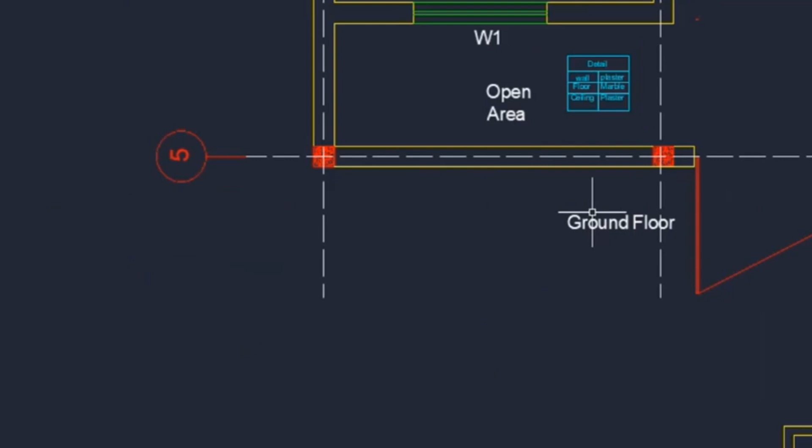Hello, in this tutorial we are going to find out brickwork in superstructure. Now for brickwork, what we need for volume: mean length of our wall, breadth of our wall and height of our wall. And with this it is very important to do the deductions as well: deduction for the columns, deduction for the doors, windows or any kind of opening. So let's move into the plan and find out the brickwork quantity over there.

Now I'm here in the architectural plan, and it is very important when you find out the brickwork that you have the architectural plan. So we have the ground floor here. We have only one floor, the ground floor, and in order to find out the brickwork we need to convert the walls into two parts, the vertical walls and the horizontal walls. It will be easy for us to calculate like this. So here we have the plan, and we have vertical walls over here, and we have horizontal walls over here.

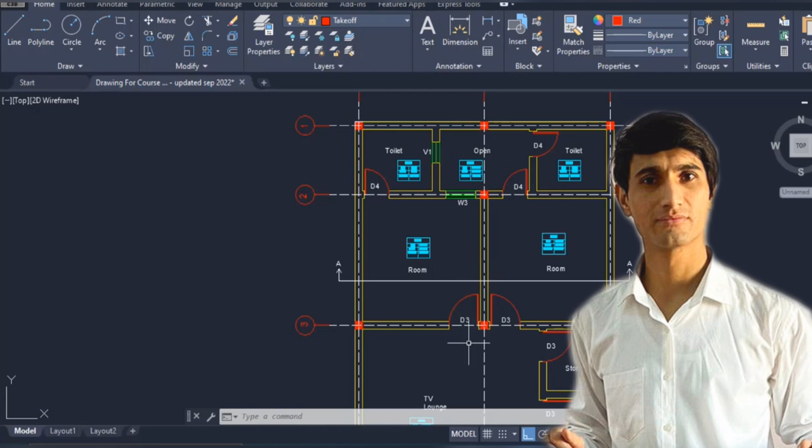And with this we have different openings, like we have doors over here, we have ventilators, we have windows over here, we have columns over here. So all of these deductions we need to do. And one of the hidden deductions over here is basically the lintel deduction. We have found out the lintel quantity in one of our previous tutorials. All we need to do is put all of the values over here in the brickwork in order to deduct the lintel deductions from that particular sheet. It is important to do the deduction regarding the lintels as well.

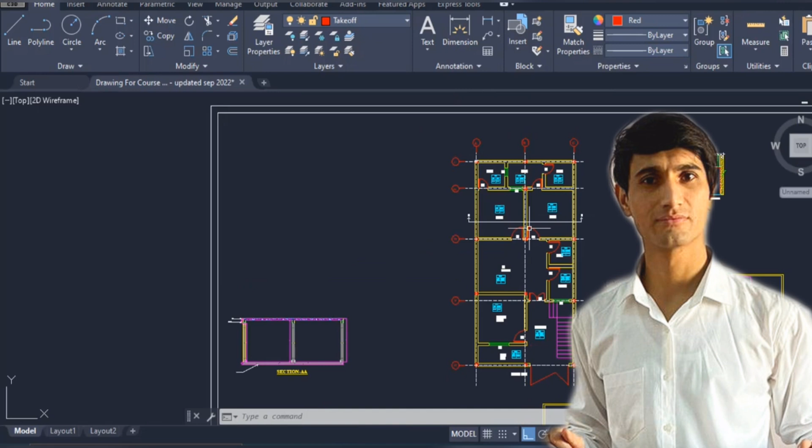So we have different walls. So what we need: length, breadth of the wall and the height. So where can we find out the height? We can simply go into the section and find out the total brickwork height. The brick will be starting right from the grade slab up till the bottom of our top beam. So it is a total of 2775. Look, from the grade slab up till the bottom of our slab the total height is 3000 mm. We have checked that in the column cross section as well. So all we need to do is deduct the depth of our top beam, minus 225, which gives us 2775. So this is the total height for the brickwork.

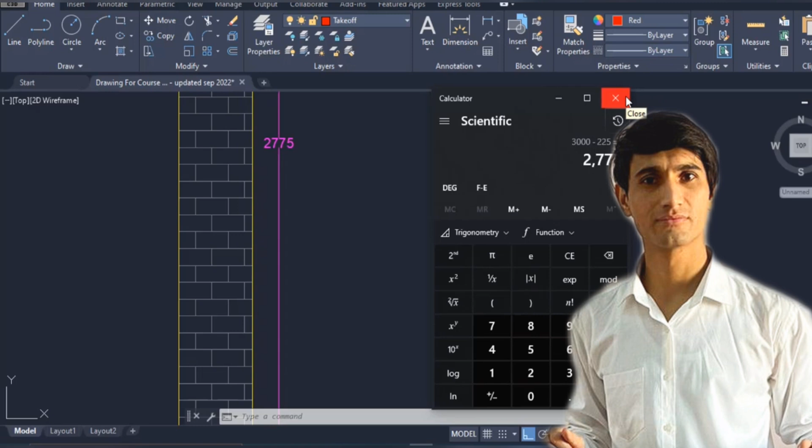So we can find out length and breadth from the plan, and for height we have found it in the section. Now in order to find out the brickwork, we will go here, find out the length, breadth and height, and put it in Excel. Simple as this. Now another thing: it is very important to check the elevations as well, especially the front elevation. In the front elevation you can see this wall is only up till this position. What is the total height for this wall? It is a total of 1500 millimeter. So for the front wall, it is important to give the height as 1500 millimeter. It is mentioned over here.

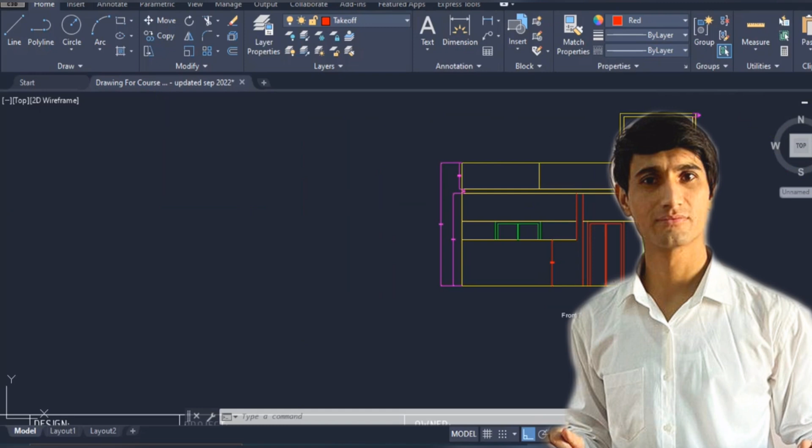Let me go here in the 3D plan to explain it. Over here you can see the plan. This is basically the front wall, and it is not the full wall up till the shade. It is a half wall of 1500 millimeter. We have checked it in the elevation as well. So we need to take the total height right from this position up till here. Remember this one.

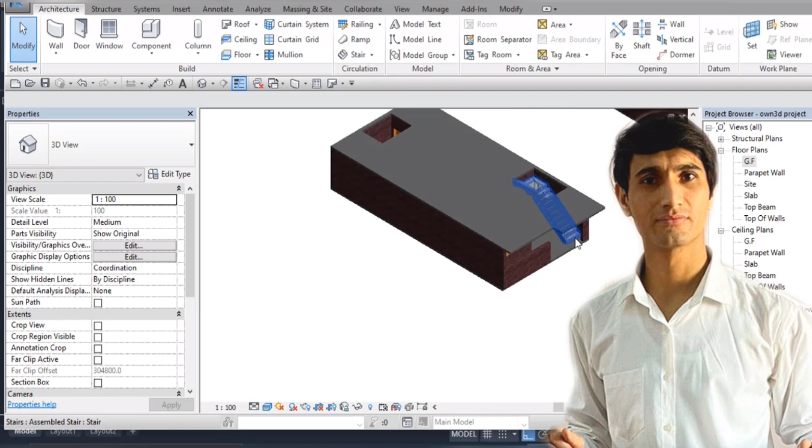Let me simply go here to check it. So the rest of the walls are up till this position. On the top of this we have the top beam. So this is the wall. Basically the height of this wall is only 1500 millimeter, so we need to take this height as 1500 millimeter. It is important to understand.

Now next, what about the lintel deductions? I have given you an example regarding this as well. So here you can see this. Let's suppose we have windows over here, and on the top of this, as I said earlier in the lintel lecture, we will have the lintel.

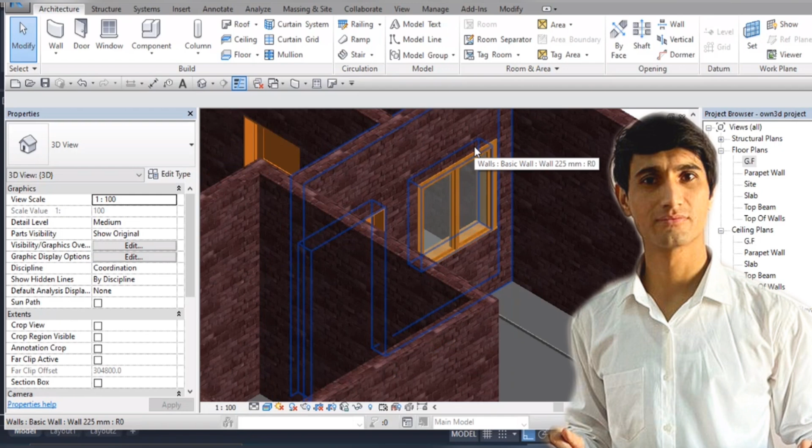And in the masonry work, while finding the brickwork, definitely the lintel is with the concreting. So we need to deduct the lintel over here as well in order to find out the exact brickwork over here. We have found out already the quantity regarding the lintel. All we need to do is, first of all, find out the total brickwork, and at last we will do the deduction regarding the lintels. No problem. So hope you understand how it will really work.

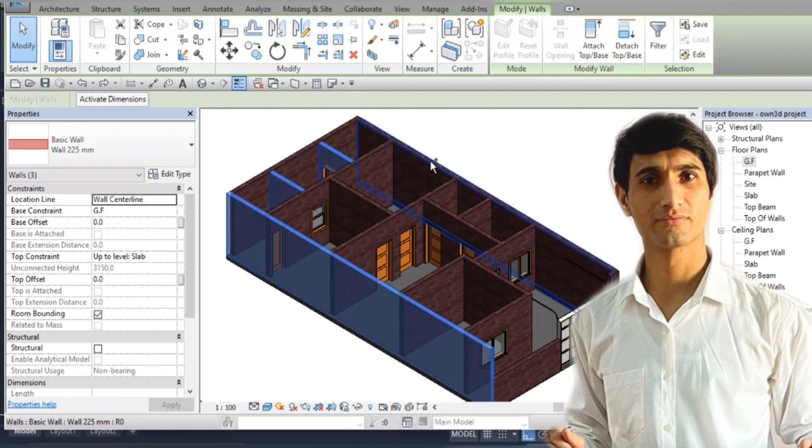First of all, we will find out the vertical walls like this, the length, the breadth and the height, and if we have any kind of columns over here, we will deduct those. This is the vertical wall again. Control plus Z, no problem. This one, this one, this one, the vertical ones. So this is how we can find out it over here.

So let's move again into the AutoCAD and let's find out the brickwork over here. I have given you the detail regarding how we can exactly find it out. If you are a beginner, then it was very important to give you the detail. So we will do it grid wise. For vertical, grid A and C, we have the same walls over here.

Let me simply go here in Excel. We have found out the concrete for the lintel, you can see, and in the lecture we have done up till W1 I think. So I have completed this one and we have found out the total quantity over here, no problem. We will deduct this, remember.

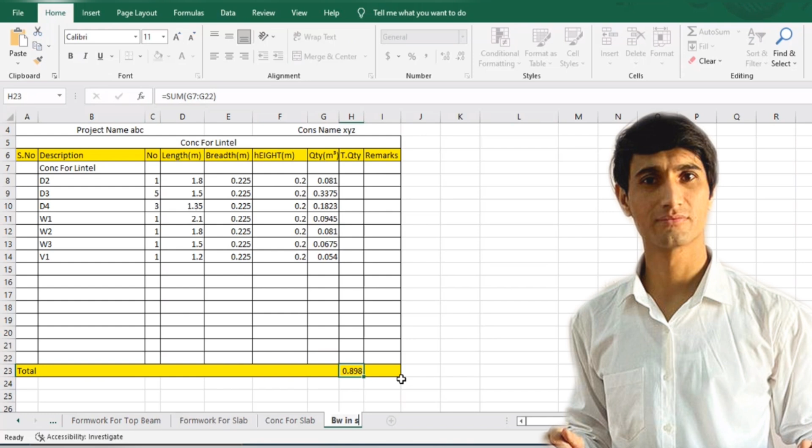So I'll move or copy this one, move to end, create copy, press OK, rename this one, and I'll write here brickwork in superstructure. Done. And here as well, brickwork in superstructure. Next, I'll delete all of this stuff from here and we will start right from this position. Let me insert some of the rows over here. It is important, like this.

And then I'll simply go here and select this one. I'll freeze this one as we did before. Go into the view, freeze pane and press OK. So this is what we need over here. Number as 1, brickwork in superstructure, brickwork in SS, and then on grid, first of all, I'll write here verticals. I'll find out first the vertical walls and then the horizontals, and on grid A and C. A and C we have the same walls as we did in the beams as well.

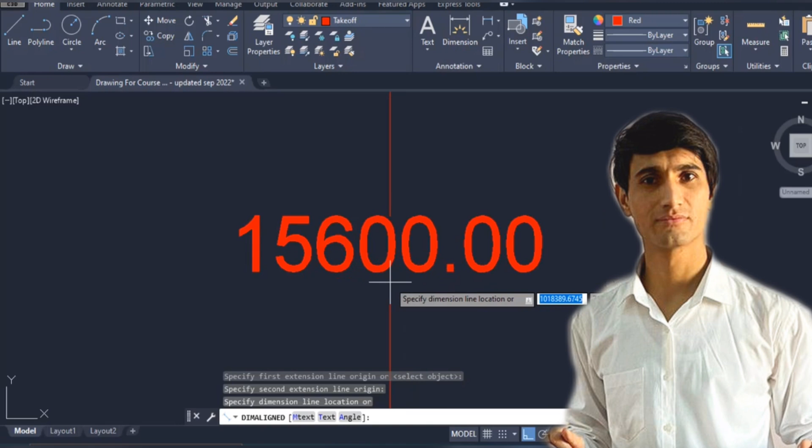A and C, we have 2 walls over here. Let's find out the total length for these walls. For total length we can go with the DAL command and start right from this position up till this position. The total length is 15.6 meter. So I'll put it as 15.6. And what about the breadth of this wall? Breadth of this wall is definitely 225 mm, so 0.225.

And what about the height? Height we have found out in the section. Let's go again into the section, and the total height is 2.775. It is equal to numbers multiplied by length multiplied by breadth multiplied by height. Hit enter. So this is the total volume, but we need to do the deductions as well. Let's check the deductions over here.

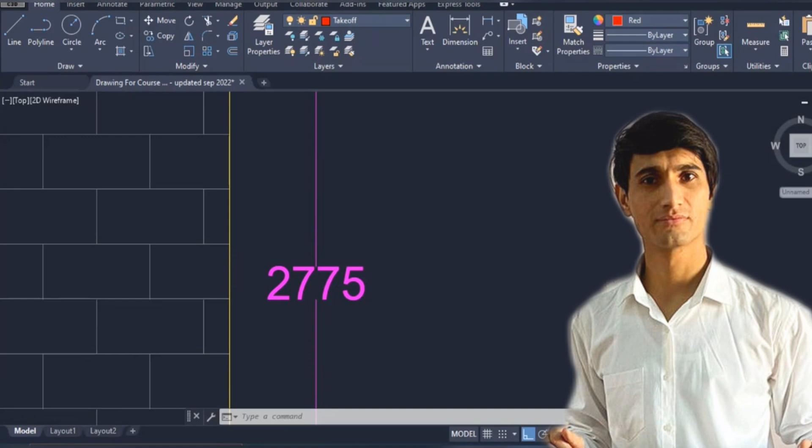In these 2 vertical walls, we have only column deductions. 1, 2, 3, 4 columns are over here. 1, 2, 3 and 4 columns are over here. So we have a total of 8 columns to deduct. I'll write here deductions, and we have column deduction. So I'll write here C1 and -8.

And what about the length, breadth and height of the column? This is 225 by 225, so 0.225 and 0.225 meter. And what about the height? Height will be the same as our brickwork because we need to deduct from the brickwork, so 2.775. Hit enter. Let's drag this value over here, and this is basically the deductions.